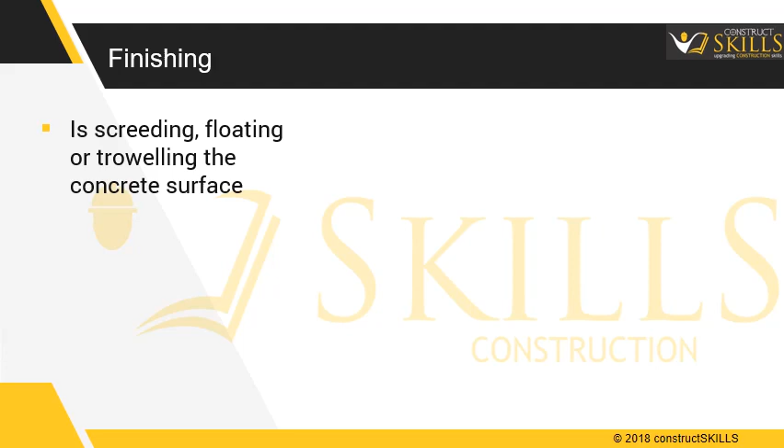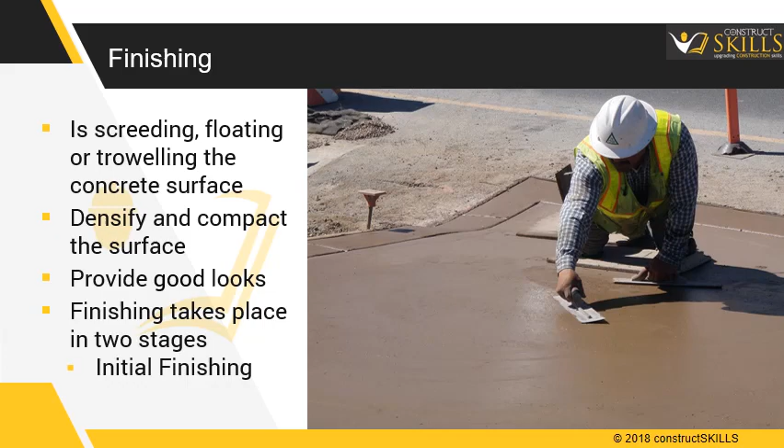In this lecture we will be discussing proper procedures to be followed to get a durable finish. Finishing: it is screeding, floating or troweling the concrete surface to densify and further compact the surface of concrete, as well as giving it the look you want. Finishing takes place in two stages: initial finishing and final finishing.

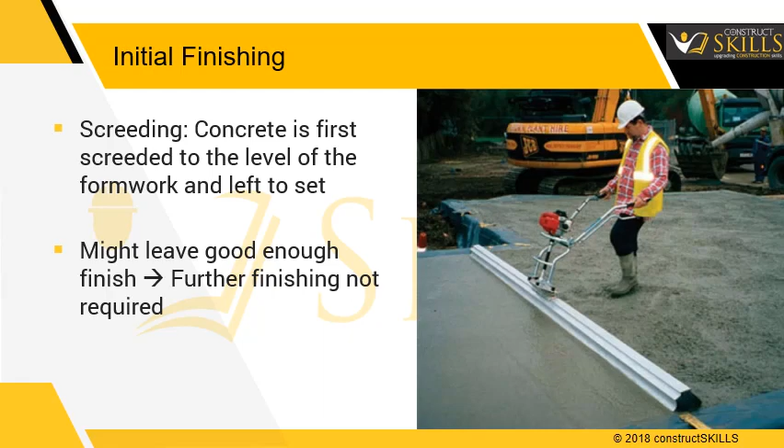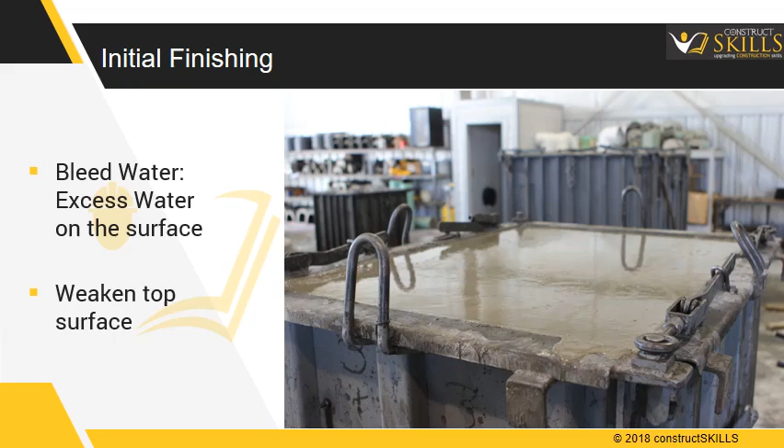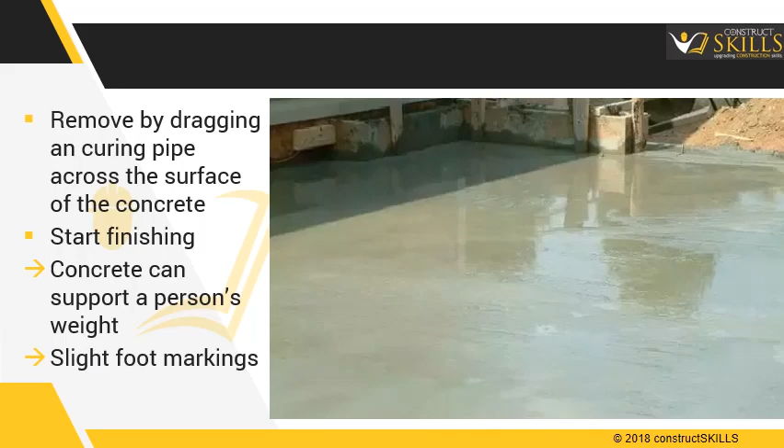Under no circumstances should finishing tools be used before accumulated water is removed. Mixing bleed water with the surface paste will weaken the top surface, possibly resulting in a dusty surface. Excess bleed water can be removed by dragging an ordinary garden hose across the surface of the concrete. Once the bleed water dries up and concrete can support a person's weight, with only a slight marking to the surface, the final finishing can begin.

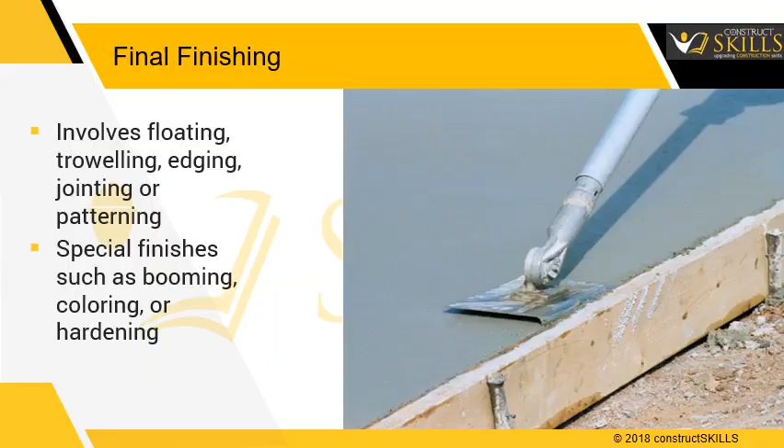Final finishing: this involves floating, troweling, edging, jointing or patterning the concrete. Special finishes such as brooming, coloring, hardening, or patterned finishes can be applied to the surface. Troweling leaves a dense, hard, smooth and durable surface. The surface should be troweled twice. A well-troweled surface will be very smooth and can be slippery when wet. Troweling can be done by hand or power trowel.

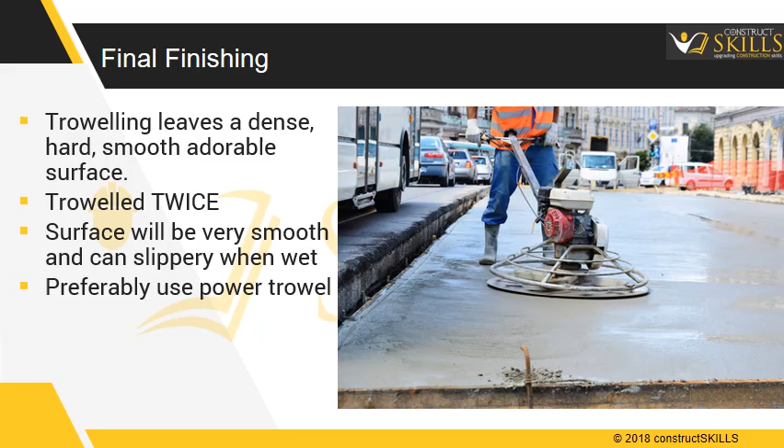All the edges of a slab should be finished with a special edging tool. This gives a neater and stronger edge, less prone to chipping. Joints should be planned before placing. Once any surface has been finished, it must be cured. The concrete used should be of the lowest practical slump. Ensure proper internal vibration has been performed.

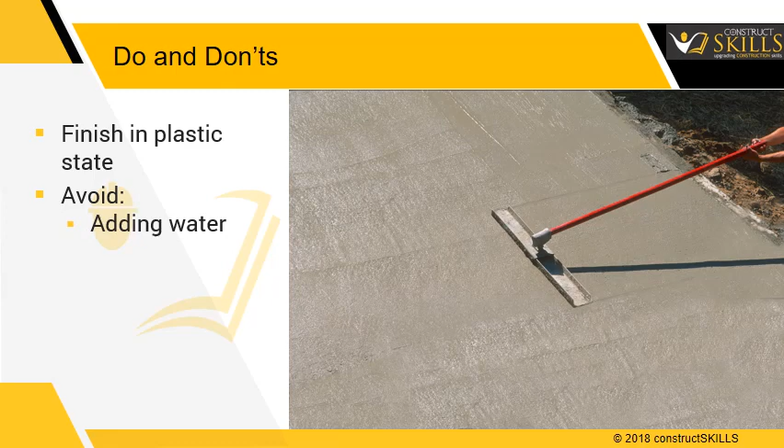Finishing should be performed within the time period in which concrete can be worked with, for example, when it is in plastic state. Manipulate concrete as little as possible to produce the desired result. Addition of water to make concrete workable, or addition of dry cement to absorb bleed water, should be avoided. A well-proportioned concrete with proper consistency should be used.

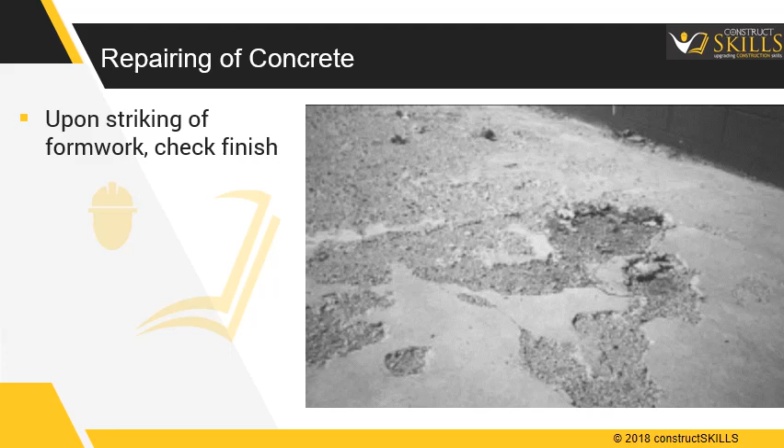Repairing of concrete: after the striking of the formwork, all concrete work shall be inspected for defects. Areas of segregation, stone pockets and other damaged areas shall be chipped and all loose material removed with compressed air or washing. This and other repair work shall be performed as soon as possible so that the concrete has not hardened completely.

Bonding of old concrete with the repair material shall be achieved by wetting the chipped out surface, sprinkling dry cement or by brushing rich cement grout. The cement mortar concrete shall have the same proportions as those of the parent concrete. The repaired areas should be cured for 24 hours.

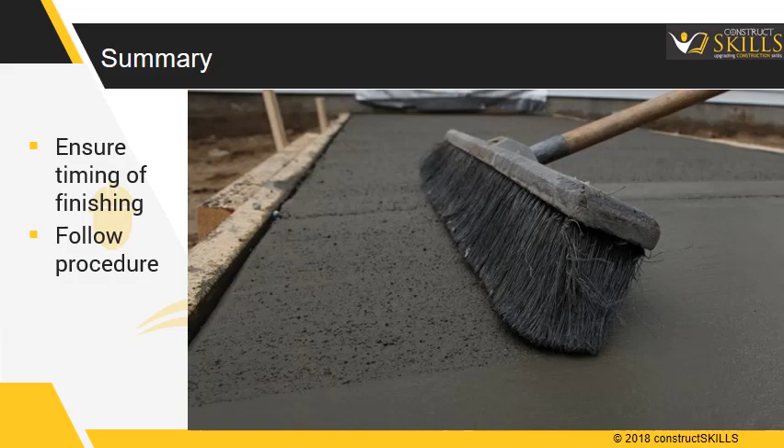Cement washing: surfaces which are not to be plastered, nor receive any other treatment, may be provided one coat of cement wash. The quality of concrete floor is highly dependent on timing and procedures followed during finishing operations. Failure to address this issue will lead to cracking, low resistance to wear, dusting, and scaling.